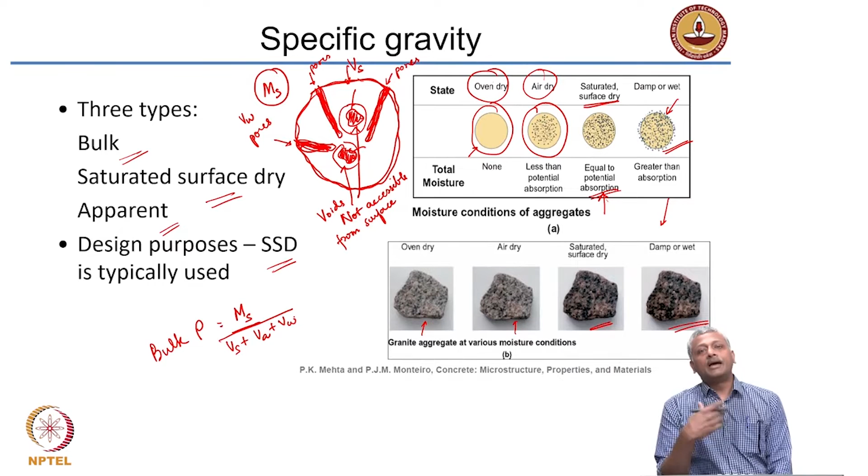Now, what is then saturated surface dry density? If I have to do SSD density, the denominator remains the same, total volume. The numerator alone changes to wet mass, the mass of the saturated surface dry aggregate. So, you take an aggregate, put it inside water for 24 hours, take it out, wipe the surface dry and measure the mass. That is your wet mass, and your saturated surface dry density is equal to the wet mass, where moisture is just equal to the absorption, divided by the total volume of the rock.

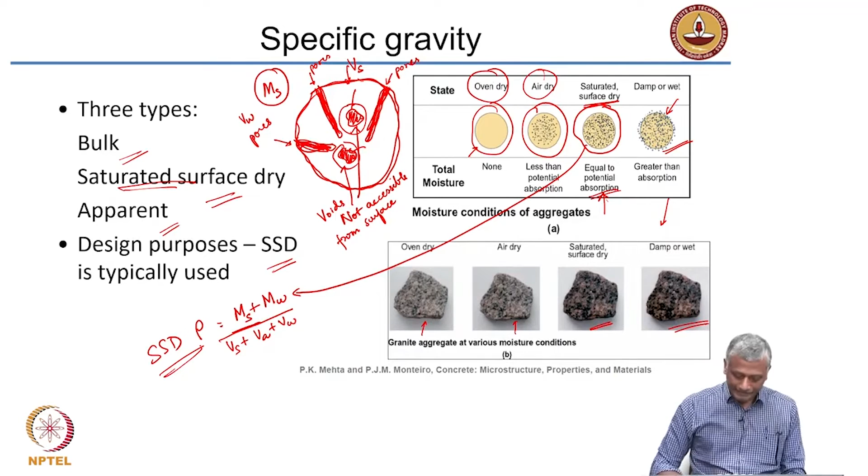So, when you start using quantities of aggregates for calculation of your mix design in concrete, make sure you understand what density value is being calculated and what is being used. Now, as I said earlier, the flakiness, elongation, the roughness, the angularity of the aggregate, all that determines also the way that the aggregate packs together. But more importantly, the gradation of the aggregate also needs to be considered for efficient packing. Now, consider that you have a 1 cubic meter container and you want to fill it up with concrete. How will you fill it up optimally?

You will fill it up optimally by choosing the particles in concrete in such a way that the particles are having a tight fit, leaving behind very less air inside the system or very less void inside the system. Why? Because when the voids go up, the strength comes down. That's basically the essence of considering packing of materials together. The higher the voids, the lower the strength. So, you want to reduce the voids, as a result of which you get higher strength.

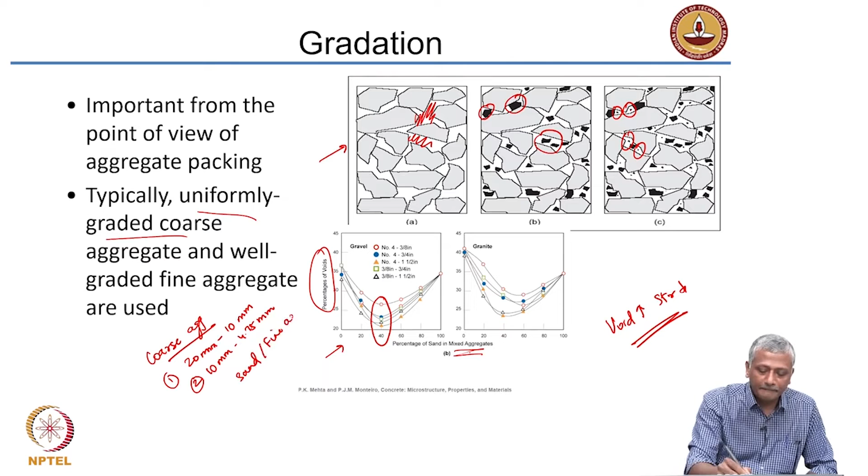Sand, on the other hand, or fine aggregate, is well graded. That means it's got particles in a large range. So, it goes all the way from 4.75 millimeters to 75 microns or 0.075 millimeter. So, particle sizes are varying over a large range, because of which they can satisfy this kind of a condition where they start filling up the voids left behind by the previous set of aggregates.

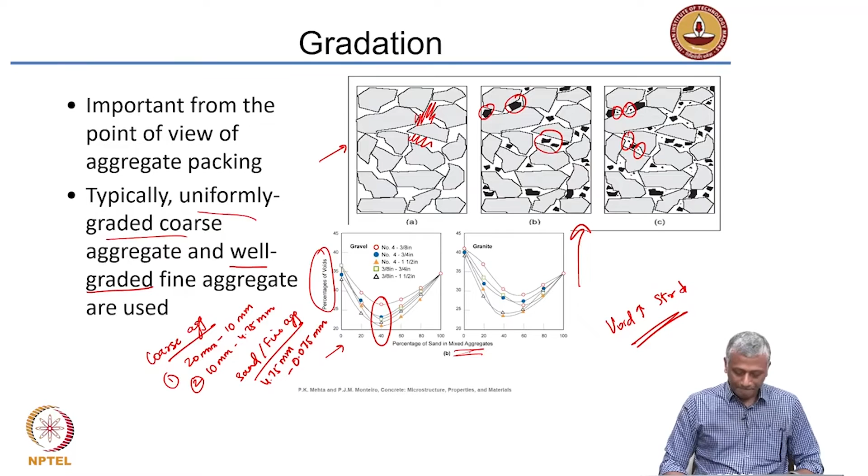Now, when you leave out sand or stone, as we already talked about, stone starts absorbing moisture and then there is a film of water that clings to the surface of the stone. In sand, of course, it is very difficult to see each individual grain, but if you take a look at sand as a volume, the fine sand is usually getting packed with some small voids inside. So, as it absorbs moisture, the water goes in and expands this void that is present between the sand. As a result, the sand appears to be larger in volume than it actually is, and that process is called bulking. So, bulking is nothing but increase in volume by uptake of moisture between grains of sand. And this is more of a problem with sources of sand that are not natural, or sometimes even with crushed stone sand.

Now, one thing I must say is that this is truly speaking a big problem only in the case of concrete where you do volume batching. That means you are measuring quantities by volume. If you are measuring by mass, all you have to do is dry this mass of wet sand and determine how much water is actually inside. That way you can actually get the exact mass of the dry sand and the mass of the water properly input into your concrete mix. If you are checking volume, then you have a problem. So, it is important to measure the moisture content of the aggregate in concrete, because otherwise that ultimately leads to a lot of hassles in the job site.

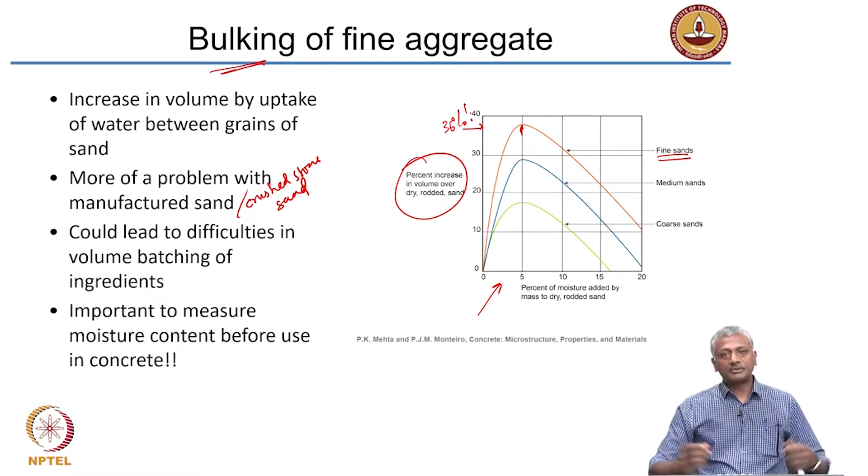Now, one of the other important properties of aggregate is its soundness. As I said, soundness is the ability of the aggregate to retain its volume. So, aggregates are porous, right. So, they are going to start taking in water, sometimes some chemicals, and these chemicals may leave behind some crystals, and these crystals forming inside the pores could cause the aggregate to expand, and if the aggregate is weak, it will start cracking. So, soundness is tested in a similar way. Again, IS 2386 needs to be referred to.

Soundness is tested by using a magnesium sulfate solution. You dip your aggregate into it and you dry it and you dip it and dry it for several cycles. What happens as a result is that in the porosity in the aggregates, you start forming crystals of magnesium sulfate inside that cause damage to the aggregate. Higher porosity, you will have a greater chance of volumetric expansion. So, you need to restrict aggregate which has poor soundness.

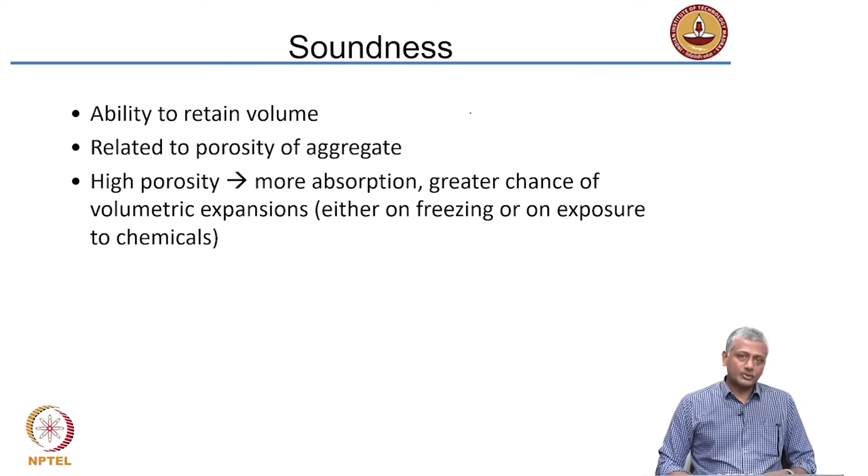In most cases, when you are doing quarrying of the aggregate, you get a uniform source or uniform type of material. In such cases, you do not really get problems with soundness unless you are going with a bad quality mineral. But when you go for riverbed gravel, you will get a mixture of different components. As a result, you may end up with some unsound particles also. You need to be careful about that.

Now, as I said again, depending upon where you are collecting your material from, you can get different types of deleterious materials. That means the poor quality materials that are inside the aggregate, like organic materials, like clay and so on, and these will affect the properties of the concrete. So, organic materials can interfere with the hydration reaction of the cement and slow it down significantly. So, you want to restrict organic material.

For example, you have basically humus, some soil, organic decaying soil may also be mixed in with the aggregate. You may get plant extracts which may be still mixed in with the aggregate, fibers and stuff like that. So, those types of things can actually affect the hydration process.

Now, when you have clay, when you break down the aggregate and it has got clay in it, the clay may start forming a lining on the surface. Sometimes aggregate that you get is dirty, that is because of the clay lining on top. If you do not clean it up well before using it, that will affect the paste aggregate bond. The paste has to bond well with the aggregate, and if you have a lining of clay on top of the aggregate, it is going to spoil the bond.

The other aspect is weak and unsound particles. As I said, when you collect aggregate from riverbeds, you need to be very careful about finding weak and unsound particles. These can cause very high water absorption and loss of strength.

Now, if you go to a construction site, increasingly you will find that very few people are using river sand. At least in Tamil Nadu that is the case. In most of India also, river sand is banned. The use of river sand is banned, or dredging of rivers for mining the sand is banned in most states in India. As a result of which, more and more people are shifting towards sources of crushed stone to be used as sand. But here you need to be careful.

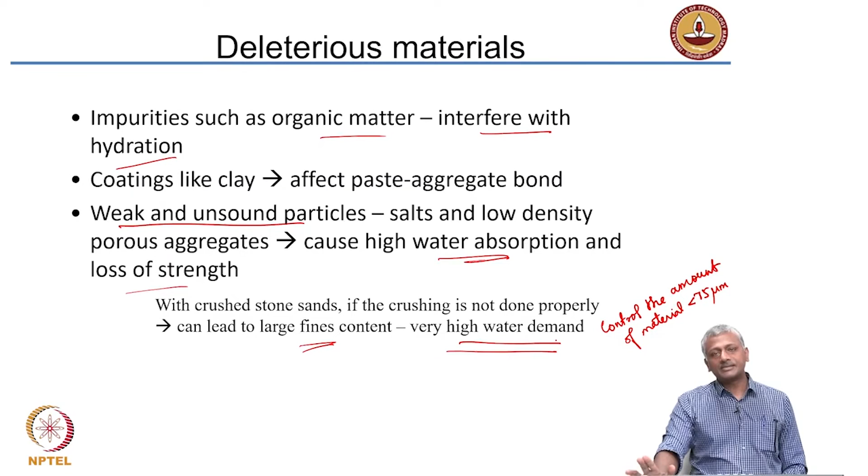The other problem with some aggregates is that they may experience what is called alkali aggregate reaction. So, some volcanic rocks, for instance, like rhyolite, andesite and so on, if you break them into aggregate size and use it in concrete, the cement, as I told you in the previous segment, has a lot of alkalis in it, and these alkalis may enter into a reaction with the silica in such aggregates and cause the formation of expansive gels. It produces expansions and that leads to cracking in concrete.

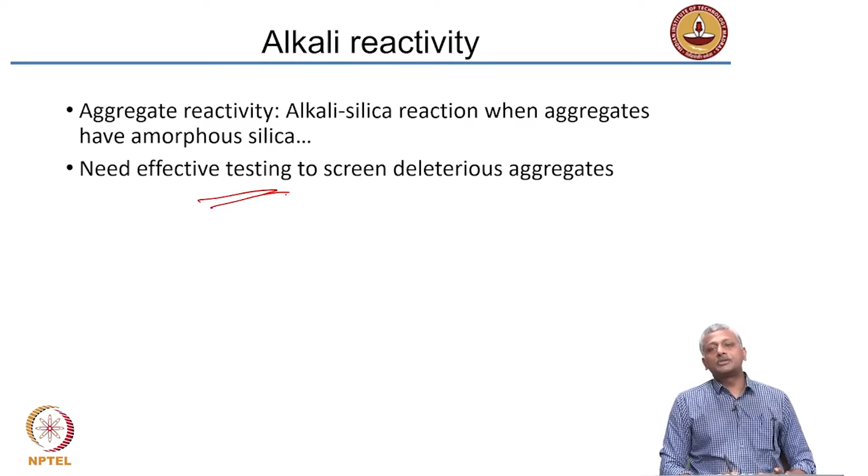So, you need to be careful about using alkali reactive aggregates. You need to do effective testing of the material to ensure that it is not going to potentially cause a problem in the concrete. Now, we have talked about the two main ingredients of concrete, that is cement and aggregate. I did not mention anything about water. Before I go to chemical admixtures, let me talk about water.

If you look at the standards that govern the use of water inside concrete, of course, this is covered in IS 456. IS 456 is basically the building code for plain and reinforced concrete. There they say what the quality of the water should be, and essentially what we want to use is potable water. What is potable water? It is simply water that you can store in your house in a pot and drink from. That quality of water is required for construction with concrete.

What if you do not have good quality water available? Then, in IS 456 there are clearly limits prescribed on the harmful ingredients that may be present inside the water, like alkalis, sodium, potassium, etc., sulfates and chlorides, and also organic matter. So, all that needs to be restricted.

If you do not have a source of potable water and you have another source, let us say bore water in your locality, and you want to use that for construction, then you need to ensure that the water is tested appropriately and you have good quality water that satisfies the limits given in this standard.

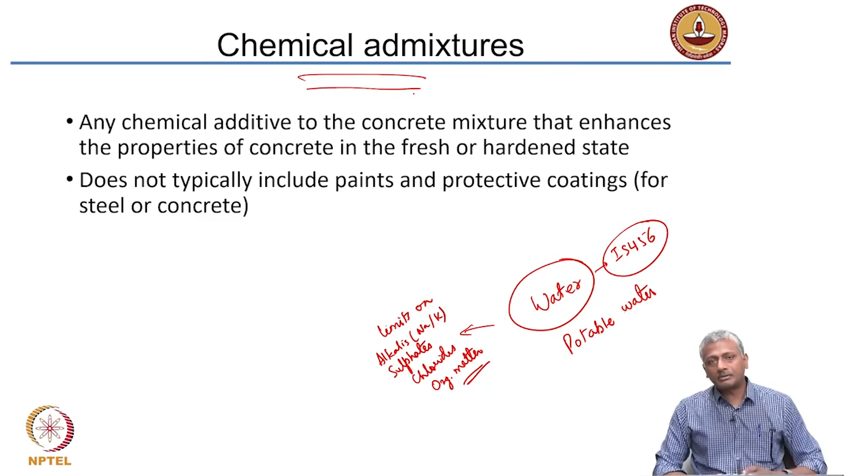Chemical admixtures are chemicals that you add to the concrete mixture at the point of mixing. These admixtures are added to improve certain characteristics of concrete. One could be workability, the other could be strength, and so on. It does not include paints and coatings, because those go on the surface after the concrete is hard. These are the materials that are added at the time of mixing the concrete ingredients together.

So, the most important chemical admixtures are the water reducers. They can reduce the quantity of water inside the concrete to attain a certain level of workability, because you need water to make concrete workable, mix it nicely and make it cohesive. You also need water to react with the cement and provide strength. So, two main purposes of having water inside the system. When you use a water reducer, you can bring down the amount of water that is needed to give you the workability.

When you bring down the water, what happens to the strength? Automatically strength goes up. The water to cement ratio is the important concept that you need to remember: the amount of water in concrete to the amount of cement in concrete. As the water cement ratio goes up, the strength comes down. So, if you are able to reduce the water cement ratio, you are obviously going to be increasing the strength. And how do you reduce water cement ratio? By using water reducers.

So, for a given workability, that means for a given consistency or fluidity of a concrete mix, the water demand can be reduced, resulting in higher strength and durability. Alternatively, you do not change the water cement ratio, keep the strength constant, but what you will have is a concrete that moves around freely. It becomes flowable. When concrete becomes flowable, you do not have to spend a lot of energy trying to compact it. We will come across these processes later.

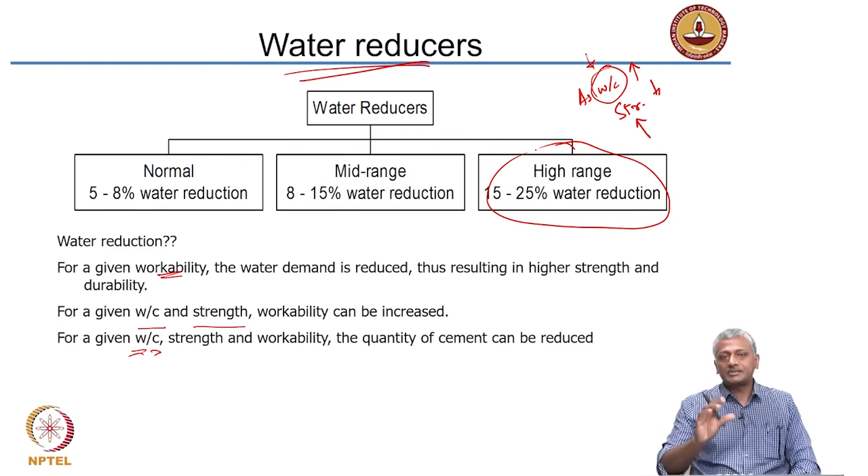You can sometimes use chemicals that can speed up the reaction or slow down the reaction depending upon the conditions that you have. When you speed it up, rightfully they are called accelerators. When you want to get strength faster, you want to finish the concrete faster, or you are working in a cold region like on a hill, in Kashmir for instance, the setting will happen very slowly because of the cold climate, or the water inside may freeze. So, in such cases, we use accelerating admixtures.

On the other hand, if you are in southern India where the heat can be tremendous, you want to use retarders, which slow down the reaction to make sure that you get enough time to work with the concrete, to put it inside the formwork, compact it and finish it. So, that is called a retarder.

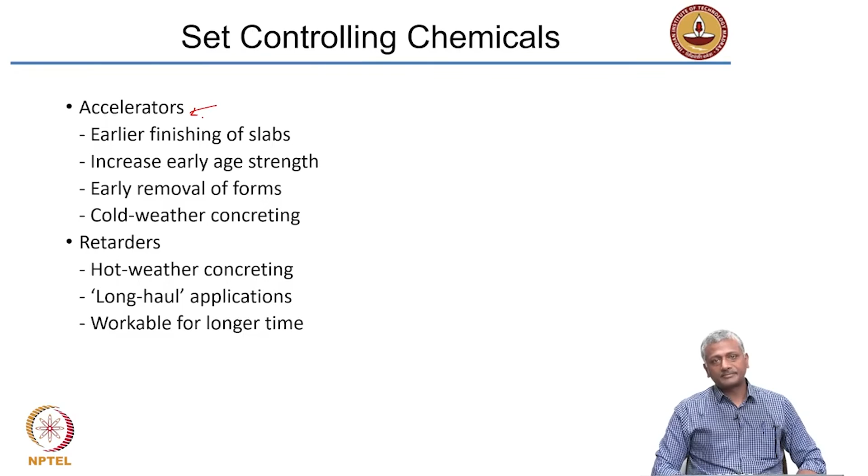Sometimes in very cold areas, you may get temperature fluctuations that can cause the water inside the concrete to freeze, and then a subsequent increase in temperature causes it to thaw. So, it freezes to ice and then changes back to water. Interestingly, when water transforms to ice, it leads to an expansion in volume. Very few materials exhibit this behavior. You have an anomalous behavior with water: when you freeze it, it expands. And this expansion leads to stresses in the concrete, causing cracking.

So, in such cases, we put very small air bubbles in the concrete. Air entraining agents create small air bubbles in the concrete that provide a space for the water to convert to ice and expand. That reduces the stress in the concrete and reduces the cracking. Freeze thaw is a major problem in certain parts of the world, and that is where air entraining agents can help. Sometimes they also lead to additional impacts like improving the workability, reducing segregation and bleeding, and increasing ductility of the system.

But please remember, we are introducing air inside the concrete. So, more air means we are bringing down the strength. Generally, for every 1% extra air that we put inside the concrete, the strength comes down by 5%. So, you need to be careful while using air entrainers.

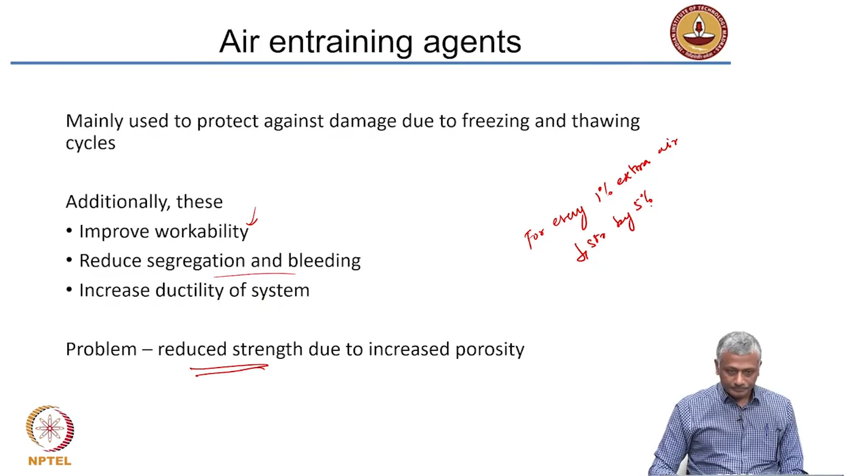Now, apart from chemicals, we sometimes add minerals also to alter the quality of the concrete. What are these minerals that we add? They are also called supplementary cementing materials. The net impact is, for the same quality of concrete, you are bringing down the consumption of cement inside the concrete. You use less cement by bringing in these minerals called supplementary cementing materials.

These minerals are usually byproducts or waste from other industries, but they have very interesting properties because of which they are able to react in a cementitious medium. When we talked about types of cement, we talked about Portland pozzolan cement and Portland slag cement. What is this pozzolan? As I said, mostly it is fly ash, and fly ash is the ash that comes out from a thermal power plant which contains some silica in it.

And that silica reacts with the calcium hydroxide generated during cement hydration to produce additional CSH. If you remember our discussions on cement, this additional CSH helps in improving durability of the concrete. So, these mineral additives essentially do that. They increase the additional CSH in the concrete, that leads to improved durability. So, generally these are used for increase in strength and durability. Sometimes they may also be used for reducing the heat of hydration.

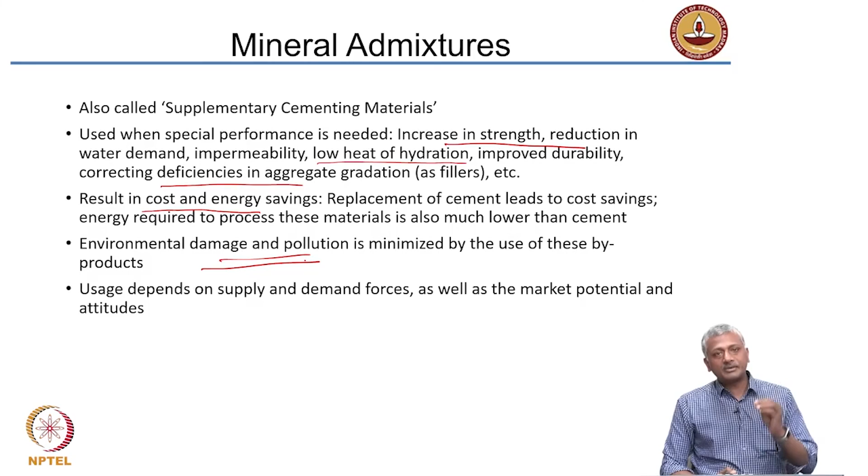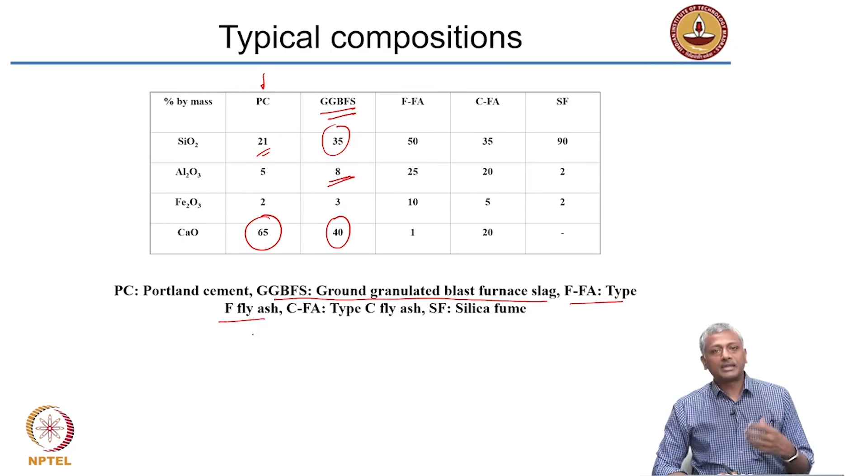Type F fly ash, which is generally obtained from burning of semi-bituminous coal, that means which does not have very much impurities, has an extremely high amount of silica and almost nil calcium content. It has also got a very high amount of alumina content. So, it is actually a very interesting material. It is a silico-aluminate, similar to what you get with clays, but not exactly as reactive as the clays.

Type C fly ash: if you have heard of a place called Neyveli in Tamil Nadu, where they have thermal power plants, Neyveli Lignite Corporation. Lignite basically is an impure form of coal. When you burn lignite, you get fly ash that has a large amount of impurities like calcium and silica and alumina. So, that is called type C fly ash or high calcium fly ash.

In certain cases, especially when they process silicon metal for the semiconductor industry, you get a very fine dust called silica fume. And this silica fume is very high purity silica, more than 90% SiO2. So again, please remember the common feature here is the silica content. And this silica reacts with calcium hydroxide that is generated during cement hydration to produce additional CSH. That's the most important part to remember.

When you use supplementary cementing materials, you end up forming additional CSH, and that is responsible for long-term strength and durability. Durability is the ability of concrete to withstand the forces of the environment around it. Not loading, but the environmental effects. We'll talk about that again towards the end of this chapter on cement and concrete.